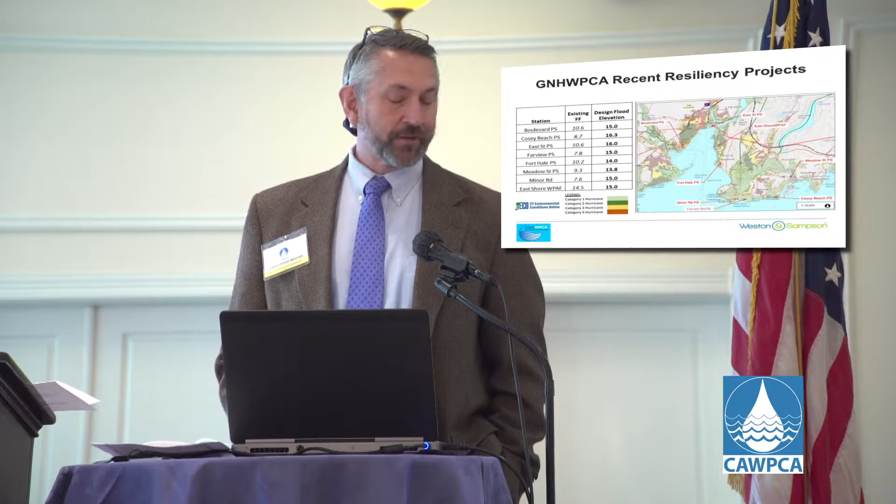Interesting that most of the pump stations, as you would expect in New Haven, are down in the low-lying areas near the shoreline, all of course subject to flooding and inundation. And interesting that some of the stations need a couple of feet of raising to get them out of harm's way, and others are nearly 10 feet. You start looking at how you're going to raise a station 10 feet, how you're going to get the equipment 10 feet up out of the way. It's a hefty task, and we've seen some interesting things, and we'll tell you about them.

Goals of the project: to protect the infrastructure, to dry and wet flood-proof some of the facilities. We've done some small stations, as many of you all have, and we're also working on some of New Haven's largest stations, and doing some interesting work to allow flooding into some portions, but protect the critical infrastructure within, and then to prohibit flooding from some of those structures as well, with the goal of keeping the equipment running, as well as allowing for staff to get to and out of the stations in a flood event so that they are safe.

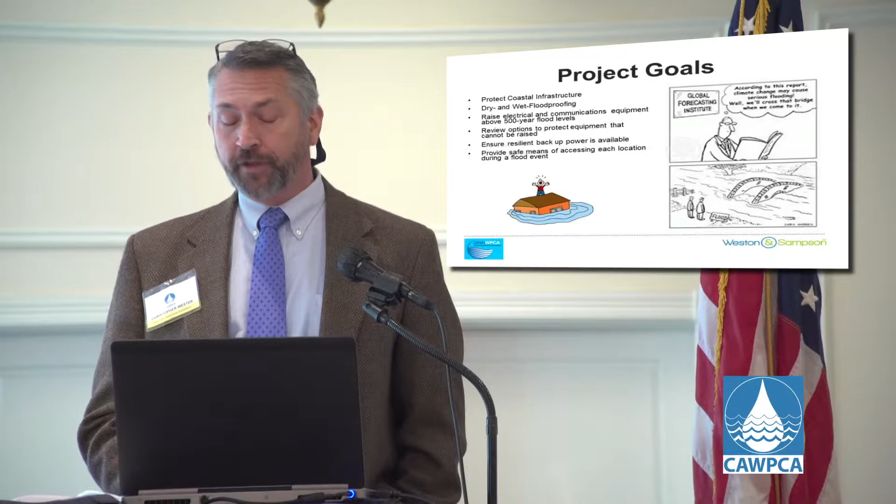So the first work that we had done a couple of years ago was to help New Haven through the construction admin portion of raising 4 of the pump stations in East Haven, and basically all followed the same sort of approach: take the station, convert it to a submersible station, and then put a control and generator building up on stilts above the flood stage. Access could still be made into the station to run the facilities. Generators, control systems, electrical systems were kept up out of the wet, and the pumps, which obviously being submersible were made to be underwater, were left to operate as such.

But it leaves you with some interesting looking buildings. You're driving down the street and see this, it looks like a house shed up on stilts. But there's not a whole lot more you can do with that. Well, there is, and we'll show you a little bit later.

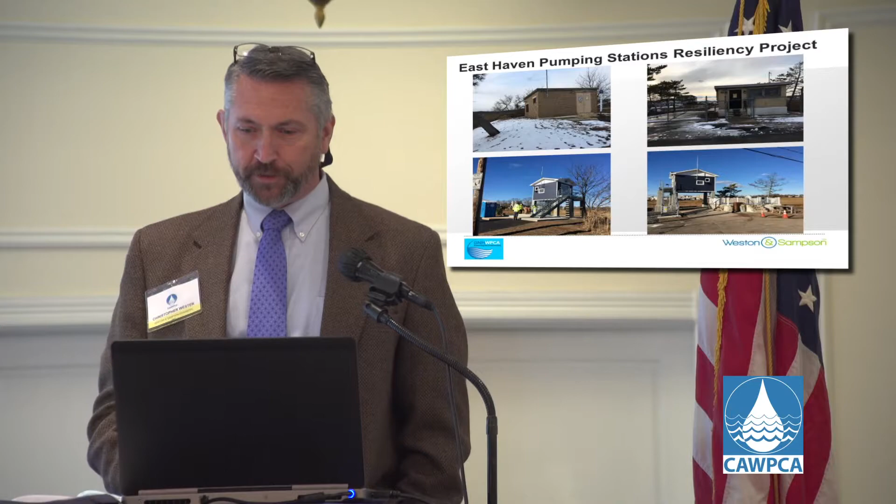So some of the things that were done, as you can see, I think Keven and the design team did a fantastic job of figuring out ways to, top left corner is basically the only remaining wall of the existing facility building that had all of the electrical and control equipment that was maintained. That was then enclosed throughout the construction.

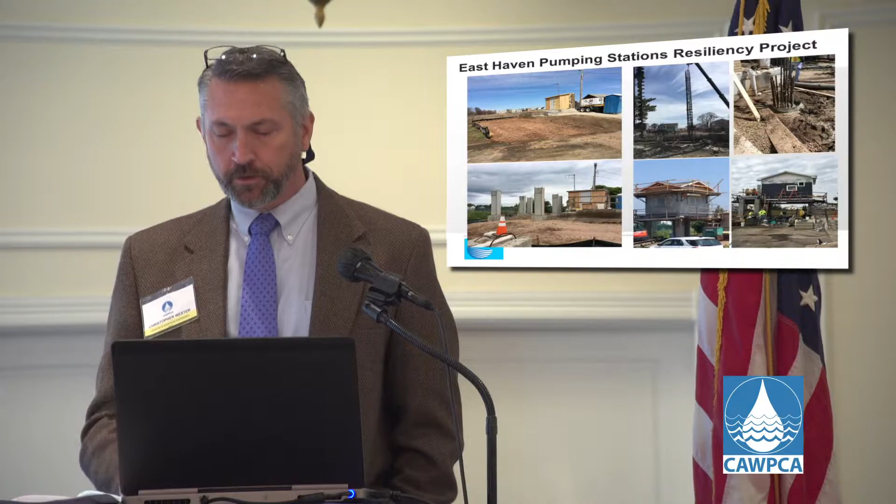and then covered with some nicer looking architectural amenities to make them look as nice as you can for the neighborhoods, I will say. Those were the first four that we helped, again, from the construction admin side of things.

And then moving into some of New Haven's larger stations, the East Street, the Boulevard, and the actual control building at the Water Pollution Control Facility. Pump stations, yes, they weren't pump station upgrades per se, but more flood control, flood mitigation measures on each of those stations. And the work that we had identified and done was to include some flood-proofing walls on the outside.

And that was quite interesting because in a flood condition where you have 5 or 6 feet of flood water going up onto a masonry wall, that wall was not made to withstand horizontal loading from a flood condition outside. So figuring out a way to get a reinforced concrete wall pasted onto the outside of the masonry wall so that it would stand up and withstand the floods. A very good design feat that Keven and the team took care of.

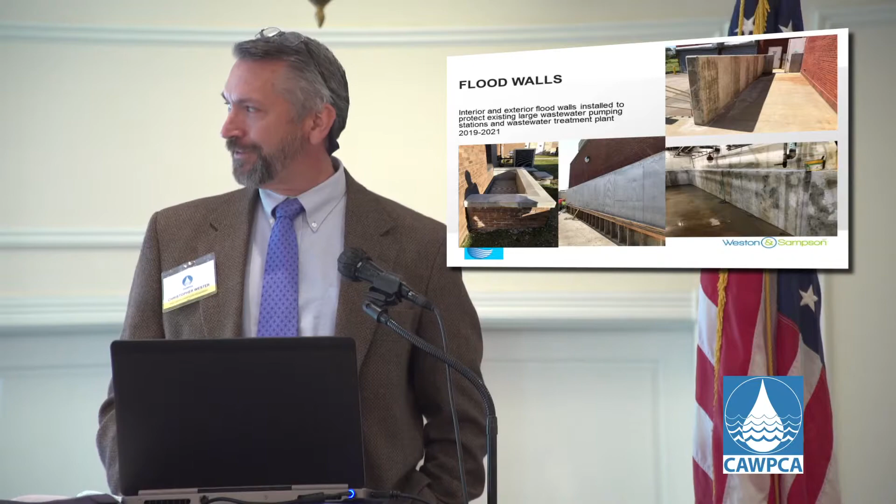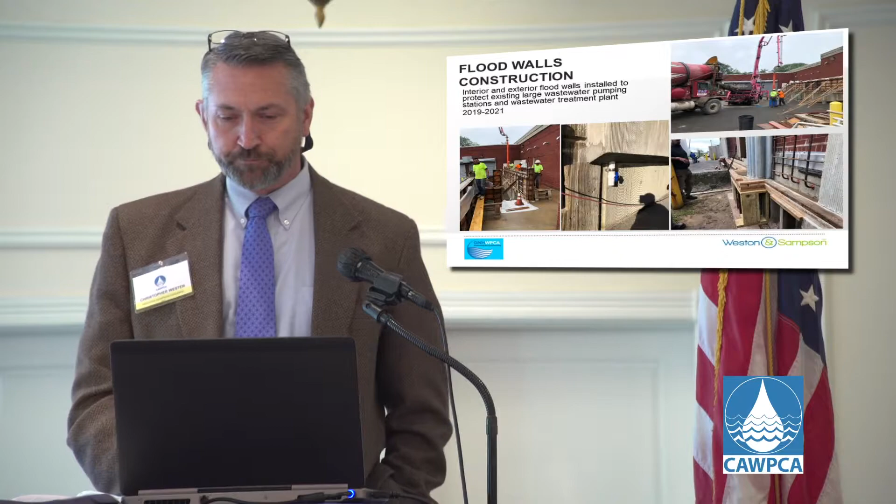As walls, brickwork gets wet, the mortar seeps, water always gets behind that, and every masonry brick wall has drain channels at the bottom of them, and if we were to encase that drain channel in concrete, the wall would fail eventually because of the water behind it. So finding out some unique and interesting ways to take care of those situations. Again, the team in Greater New Haven worked on some very good details to figure that out.

So it's been interesting. Isabel and I were just talking about the delivery times for things like that over the last year have been challenging, to say the very least. But we're nearing having that all finalized, and it's been very, very successful.

Now, the 8th station we haven't spoken about specifically yet, that's Fort Hale. And Fort Hale is pretty interesting because of its location, because of its historic nature, and the desire to make something look decent in a neighborhood that folks come to visit the facility. Fort Hale pump station itself sits right at the entrance to the Fort Hale Park.

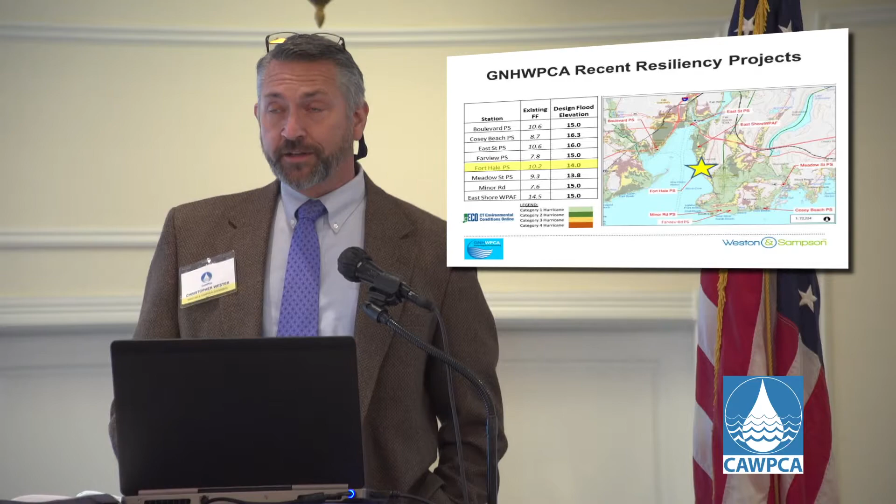Fort Hale Park, very historic in nature from the Revolutionary War, the Civil War. Actually saw some action there during the Revolutionary War in 1779 when the British sent a bunch of ships to New Haven Harbor and to Norwalk and to other areas.

A group of 19 heroic soldiers defended the fort, defended the harbor, as long as they could until they ran out of ammo, shooting from the Fort Hale facilities. And when they ran out of ammo, the British were able to overrun and make it into New Haven to do what they were going to do, but the great people of New Haven, as they still do today, hosted

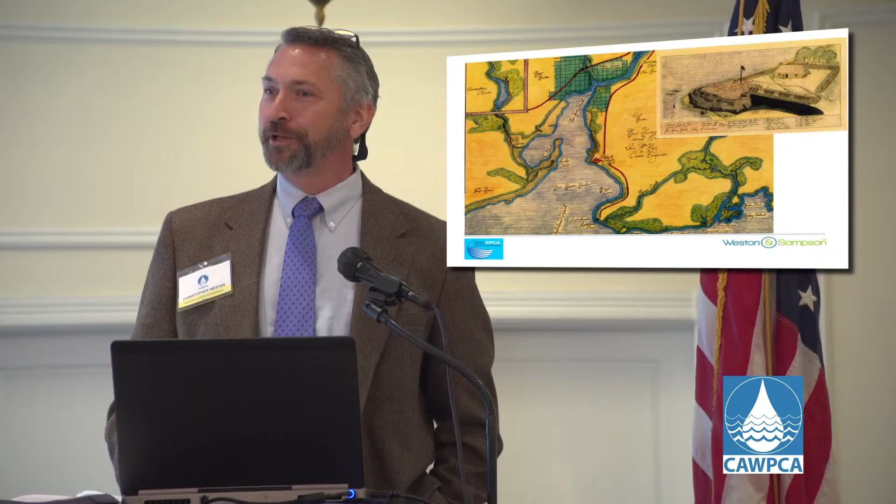them, shared their rum, got them drunk enough that they forgot what they were doing, and they all went back to their ships to sleep off their hangover, and damaged a little bit, pillaged a little bit, but it was nowhere near as bad as it could have been. So Fort Hale played a fantastic role in that.

Today, Fort Hale is surrounded by some very, very important facilities, the U.S. Coast Guard Station, the U.S. Marine Corps Reserve Center on the north and on the south of the facility, and what you see in the center there, the star, is where our pump station at Fort Hale is.

Kevin's going to talk to wrap things up about some of the detail and show you how the station turned out, and I will admit at this point in time that we had to actually use an architect to help us do this because our engineering expertise and our creativity for making things look nice is sometimes limited. That's just the nature of what engineers do. So Kevin, why don't you take it and run with some more of the technicals.

Thank you, Chris. I'm Kevin McKenna. I'd like to walk through a brief description of the design and construction of the Fort Hale pump station. The existing pump station was built in 1946. The 14 by 11 foot concrete structure originally housed two ejector pumps in the lower level. In 1967, the station was reconfigured with submersible pumps installed, and the wet well and valve chamber were constructed in the lower level.

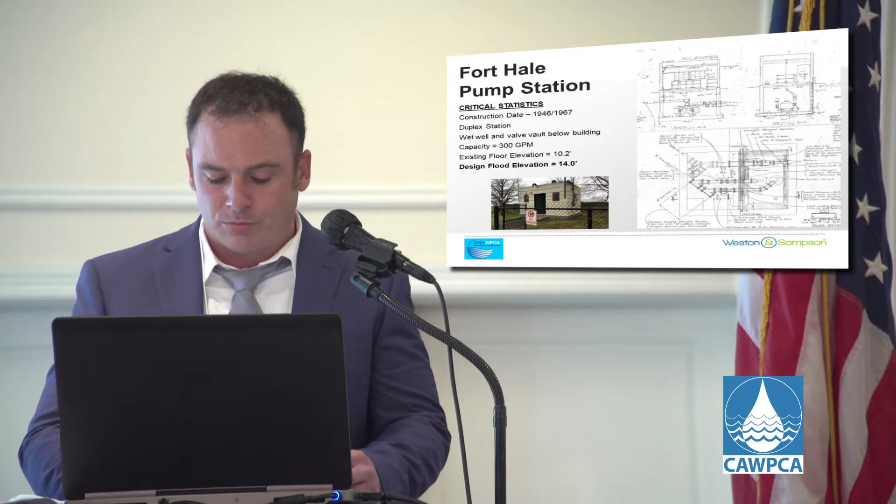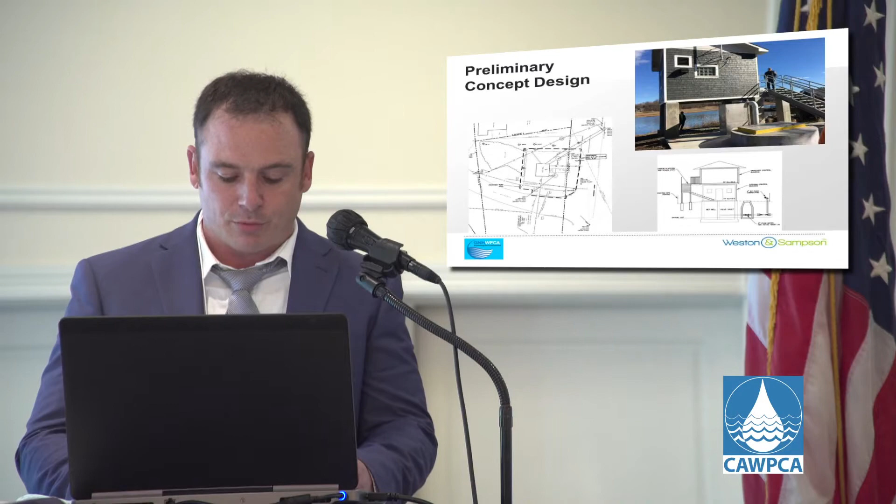The original thought was to install a new control building on piers similar to previous East Haven pump stations, but due to the tight site and the number of buried utilities in the area, the option to keep the existing structure and place a new structure on top of the existing was reviewed. This approach would remove the requirements for costly piles and limit the size of the station footprint to allow for some aesthetic improvements.

This rendering and section shown here were developed to meet these outlined goals. In order to house the required electrical and control panels along with the generator, the building was slightly larger than the existing building. Also, the requested 72-hour generator fuel tank pushed the ceiling height up, which gave the building a look similar to the fort. As it is located next to the entrance of the Fort Hale Park, the decision was to incorporate this into the architectural design.

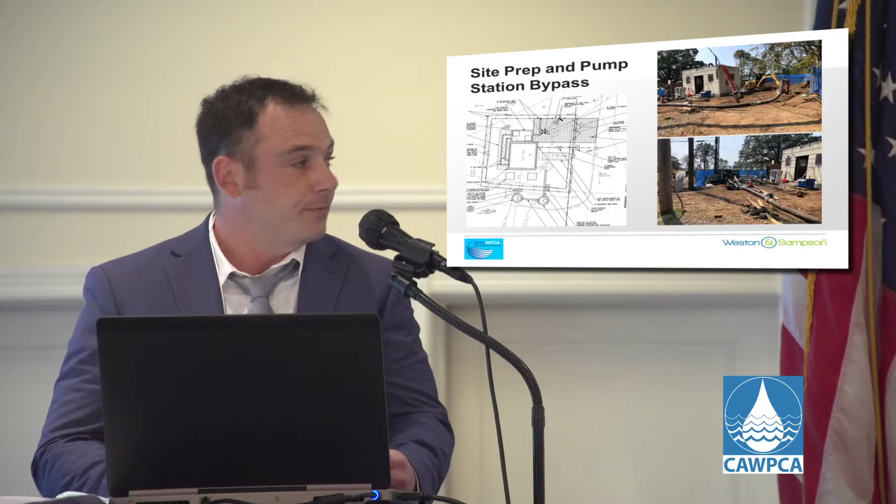In order to facilitate construction, we installed some new gravity sewer piping and manholes to direct flow to a single manhole in front of the station, which would act as the bypass pump suction point. The existing force main was located, and an above-ground bypass connection was installed. With isolation valves, a primary electrical pump and backup diesel bypass pumps were installed, and the station was able to be shut down and allow for demolition of the existing and installation of the new station upgrades. The valve vault was also moved outside the building to the north to allow for easier maintenance access.

Here are some photos of the station during construction. You can see top left, that was the existing wet well, which was gutted, pipes and pumps removed. The concrete was inspected for cracks or spalling. The minor issues we found were repaired, and the entire wet well was lined with reinforced epoxy. New pumps and force main piping were installed from the wet well to the new valve vault chamber. You can see in the bottom left.

The lower level was prepped for the installation of four 8 by 8 half-inch columns to support the overhead control building. And then the building was stick-built on site with metal studs, plywood sheeting, and Hardie board.

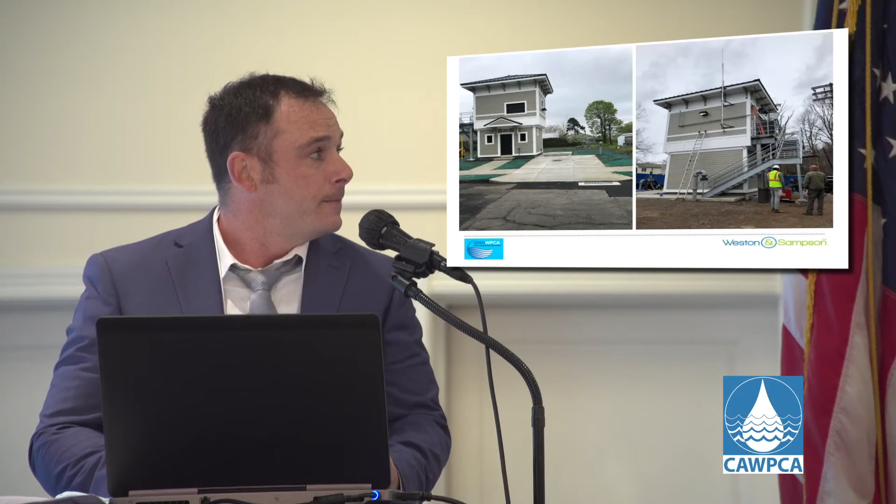And this is the final product. We met the goals of protecting all sensitive equipment, adding a standby generator and bypass connection, and we have a beautiful, resilient wastewater treatment pump station.

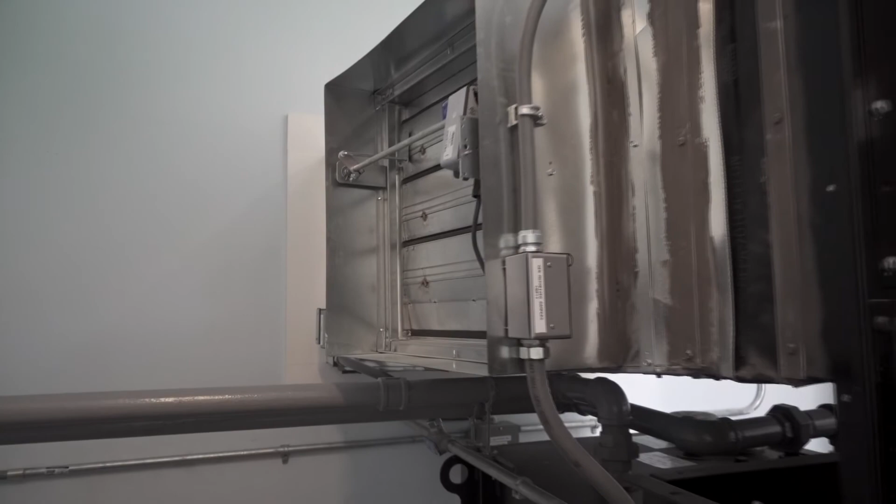I showed that to my wife, like, look at how cool this is. She's like, you're crazy. All right.